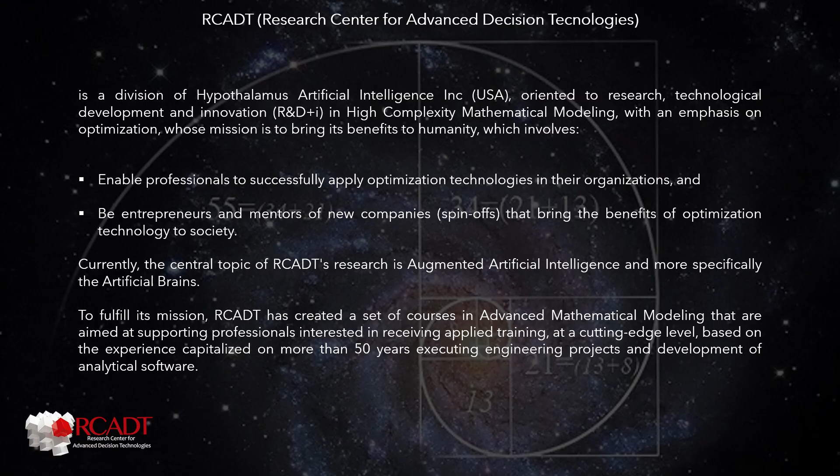To fulfill its mission, RCADT has created a set of courses in advanced mathematical modeling that are aimed at supporting professionals interested in receiving applied training at a cutting-edge level, based on the experience capitalized on more than 50 years executing engineering projects and development of analytical software.

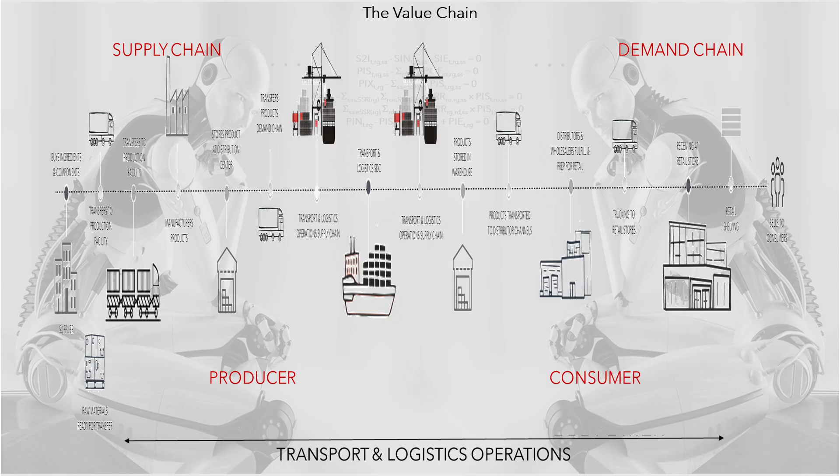The diagram presents the chain of the company's production chains that together make up the value chain. One of the greatest evolutions in the modeling of companies occurs in the interpretation of their value chain, linked to the evolution of different administrative practices and technological solutions leading to EWO.

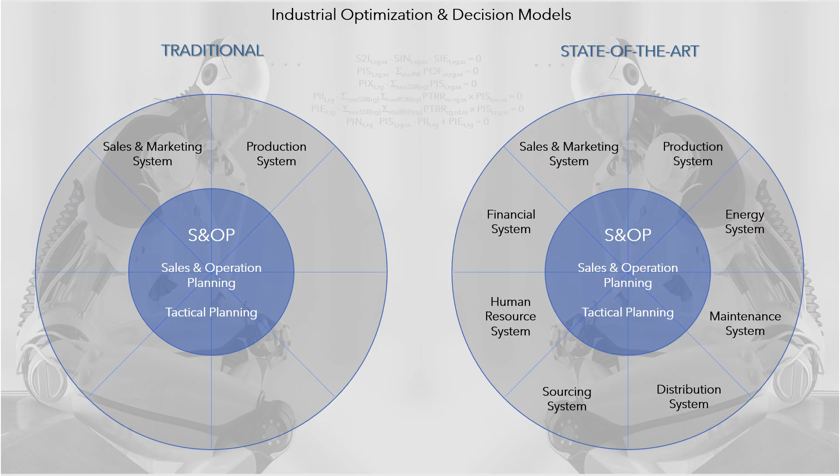Thanks to computational power, the integration process has continued to grow. The diagram presents the original S&OP model and its current version, which integrates more and more models.

This evolution has led to modeling based on artificial hypothalamus, supported by the integration of mathematical programming and artificial intelligence. The power of today's technology is not in the mathematical calculations it allows to be performed, it is in the mathematical calculations we can imagine we can perform.

Those interested in learning more about artificial brains are invited to read the white paper, Oil and Gas Artificial Brains, Case Pipelines Transportation, which is part of the course material on Oil and Gas Supply Chain.

The oil industry includes global processes of exploration, extraction, refining, transportation and marketing of petroleum products. The largest volume products in the industry are fuels, natural gas, fuel oil, and gasoline. However, petroleum is the raw material for many chemicals, including pharmaceuticals, solvents, fertilizers, pesticides and plastics.

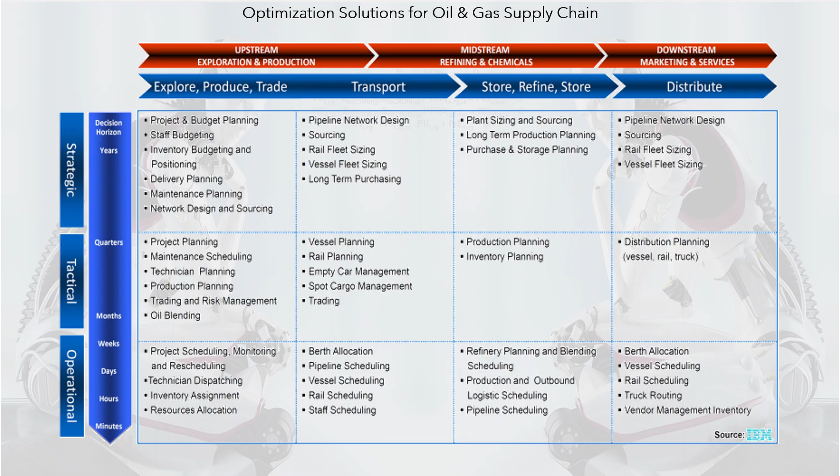The table, elaborated by IBM, shows a resume of the optimization solutions for oil and gas enterprises. At the origin of mathematical models in computers, starting in 1947, decision support systems, which represent the optimization system of an O&G company, have been visualized as composed of multiple mathematical problems, one for each line of the table, which are operated individually and communicated sequentially by humans. This way of operating produces solutions close to the optimal, but not optimal, because they generally have no feedback. The current technological revolution completely changes this approach.

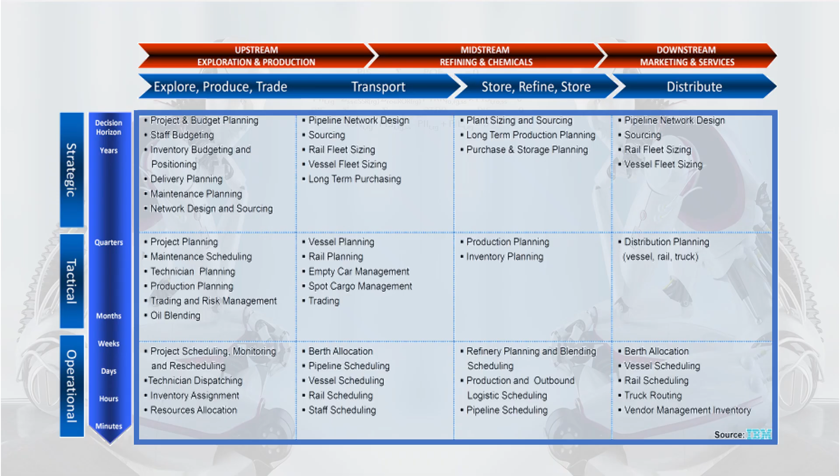Today, O&G's business optimization can be visualized as a single supermodel, composed of submodels, which in turn are made up of mathematical problems, one for each line of the table, which are solved by running in parallel, autonomously, communicating with each other, and managed by a mathematical artificial intelligence, produced by a generative artificial intelligence.

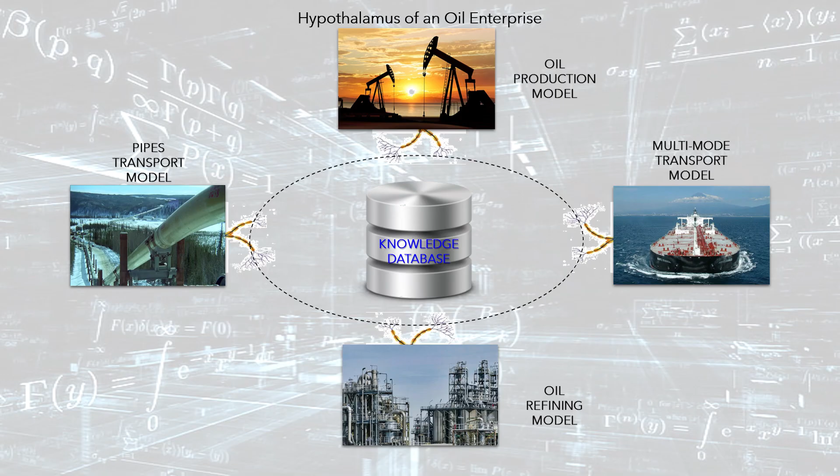The image presents the main models associated with the production of oil and gas. Oil and gas enterprise-wide optimization system integrates mathematical models for each of oil and gas's supply chain links, so that supply chain planning is managed with a holistic view.

Oil and gas production optimization integrates reservoir behavior as part of the optimization model. Considers four fundamental aspects: production system, reservoir behavior, operating modes of wells, and flow in the hydraulic system.

The objectives of optimization models depend on the planning horizon, and can be divided into real-time, advanced control, scheduling, short-term production optimization, planning, medium-term field optimization, strategic operations planning, long-term planning, reservoir recovery optimization, and strategic investment planning, portfolio optimization in oil exploration and production.

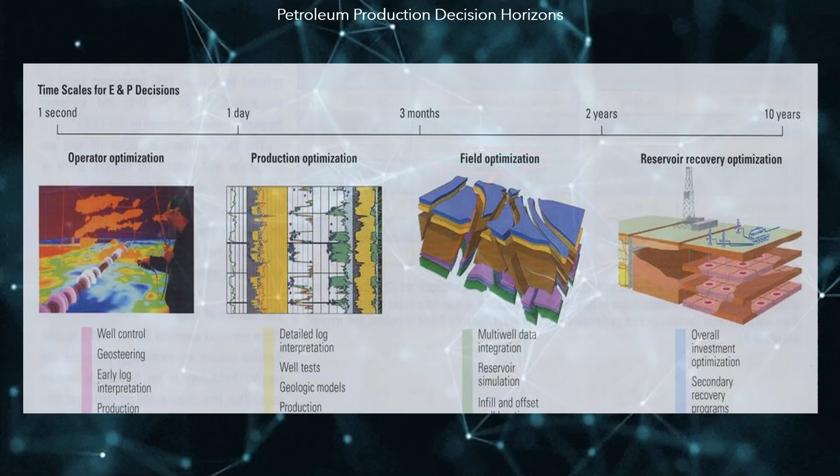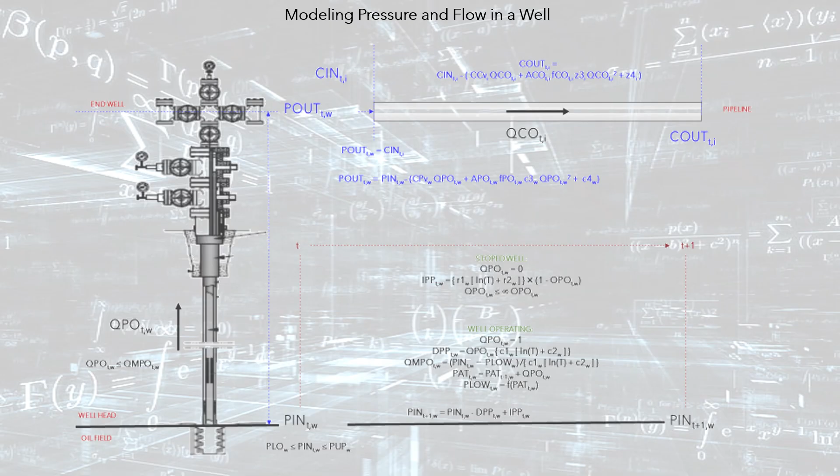The diagram summarizes the connectivity of the mathematical elements that allow modeling the well, in the aspects related to the pressure and flow of hydrocarbons, along the hydraulic system that is part of the production system.

Operations planning integrates multiple fields, which in turn comprise multiple oil or gas wells, which are operated by means of multi-well interconnection. Interconnection, which occurs at the surface facilities, allows gas and oil can be sent to storage for subsequent release through a transport system. The goal of optimization is to determine the contribution of each well, to meet demand while minimizing the total cost of the operation during the planning horizon.

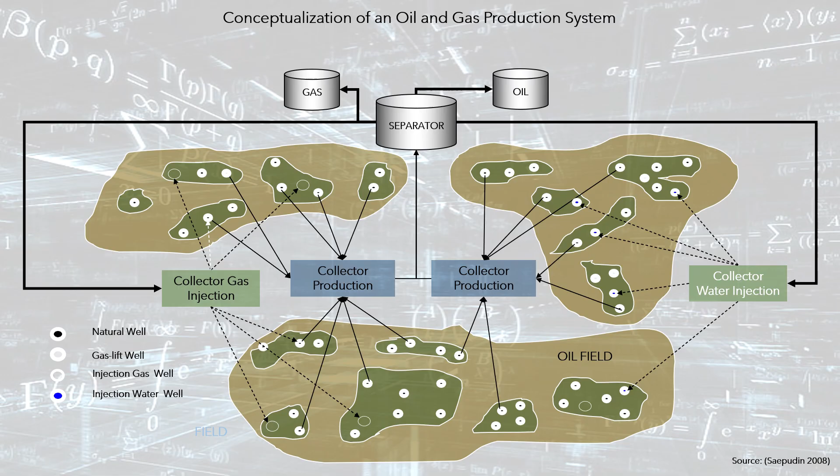This cost is associated with energy consumption in the production system, plus investment in adaptation of deposits when this restructuring of the productive system topology is allowed in the model. Smart grids, flue gas and hydrogen production, in oil and gas fields, are new activities that need to be optimized in the oil industry.

Oil transport, trading and blending optimization corresponds to a dynamic model that optimizes oil distribution between fields, refineries and ports, the oil mix for use in refineries, the mixture of oil for export in accordance with quality standards and established supply contracts, import of oil according to offers in the spot global oil market, and import/export of oil according to offers in the oil derivatives financial instruments.

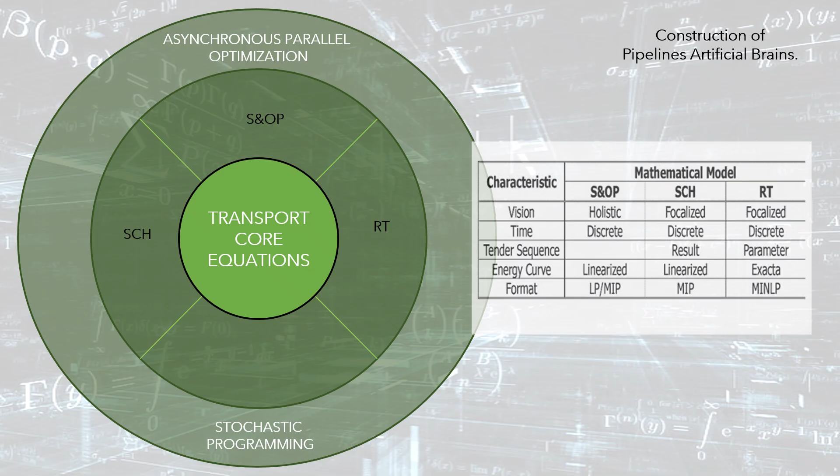Pipelines planning and scheduling. The image presents the main models associated with the transport of oil and gas. Piping systems require at least three models to coordinate their operation: S&OP, tactical planning, on the order of months and weeks; SCH, daily operations scheduling, such as tenders planning; and RT, real-time, on the order of hours.

Under the principle of transitivity of algebraic formulations, models grow in complexity as they descend from the hierarchy of decisions. All models share equations, mainly those related to the physical process. Therefore, they can be made in a continuous modeling process.

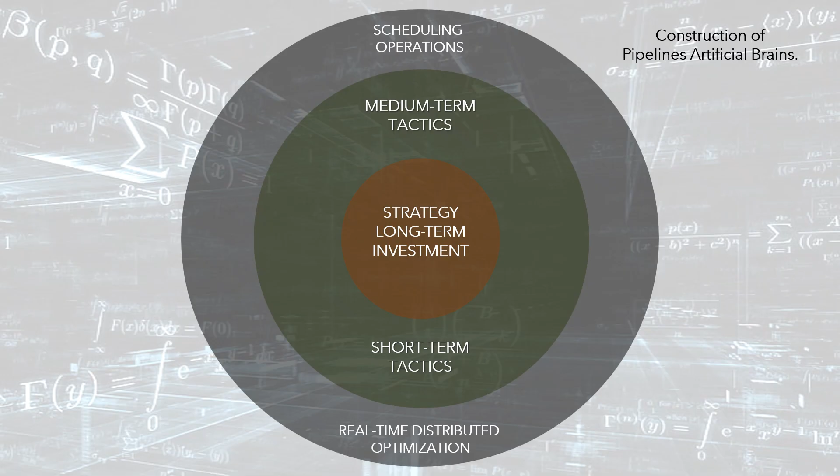The models of higher hierarchy will be more aggregated, in order to cover long periods of analysis, on the order of years. The emphasis of the model should include the interpretation of the economic and technological future, so it is appropriate that they are stochastic optimized. As the models approach real time, the level of detail increases, and the planning period decreases, the most important being the engineering representation of the process.

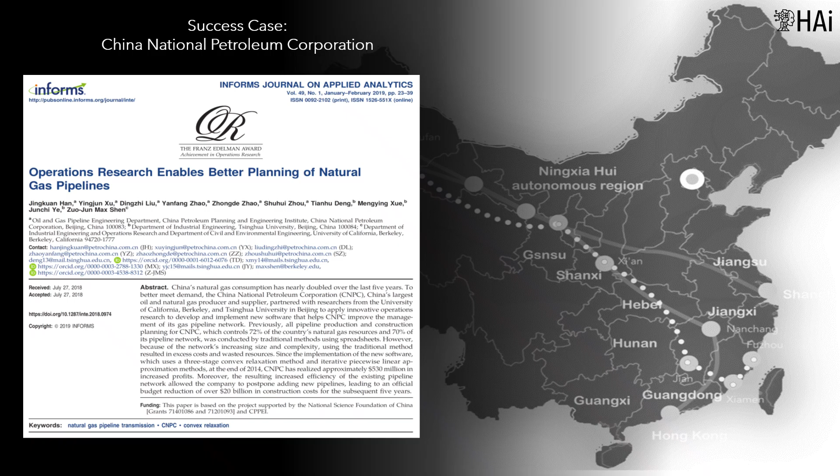The function of every organization is to produce wealth for all its owners, and this is not obtained only with goodwill. The paper Operations Research Enables Better Planning of Natural Gas presents the use of mathematical optimization models for pipeline planning. China's natural gas consumption has nearly doubled in the past 5 years.

To better meet demand, the China National Petroleum Corporation, CNPC, China's largest producer and supplier of oil and natural gas, partnered with researchers from the University of California Berkeley and Tsinghua University in Beijing to apply operations research to develop and implement new software to help CNPC improve the management of its pipeline network.

Previously, all pipeline production and construction planning for CNPC, which controls 72% of the country's natural gas resources and 70% of its pipeline network, was done by traditional methods using spreadsheets.

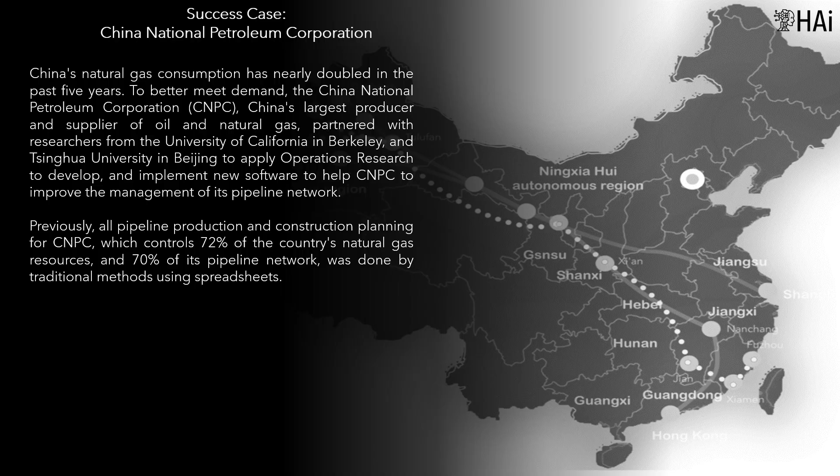However, due to the increasing size and complexity of the network, the use of the traditional method resulted in excessive costs and wasted resources. Since implementing the new software, which uses a 3-stage convex relaxation method and iterative piecewise linear approximation methods, in late 2014, CNPC has obtained approximately $530 million of American dollars in increased earnings, 2015 to 2017.

In addition, the resulting increase in the efficiency of the existing pipeline network allowed the company to postpone the addition of new pipes, leading to an official budget reduction of more than $20 billion of American dollars in construction costs for the following 5 years.

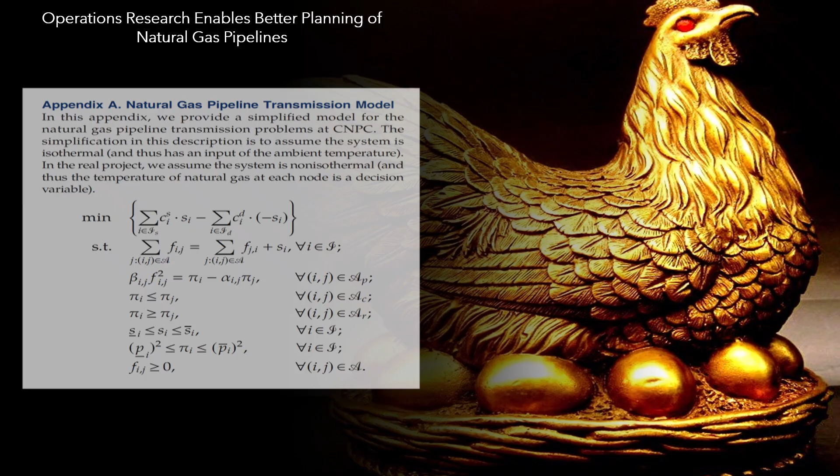The image presents the algebraic formulation of the natural gas pipeline transmission model. Without fear of being wrong, it can be said that mathematical optimization models are the goose that lays the golden eggs of China National Petroleum Corporation.

Oil transport systems optimization corresponds to a general model, common to all types of oil products: raw, refined, natural gas, and biomass, which represents the process for a specific system, including particular equations when required. It considers 2 types of transport modes: pipes and multimodal vehicles, like vessels, barges, train tanks, and/or truck tanks.

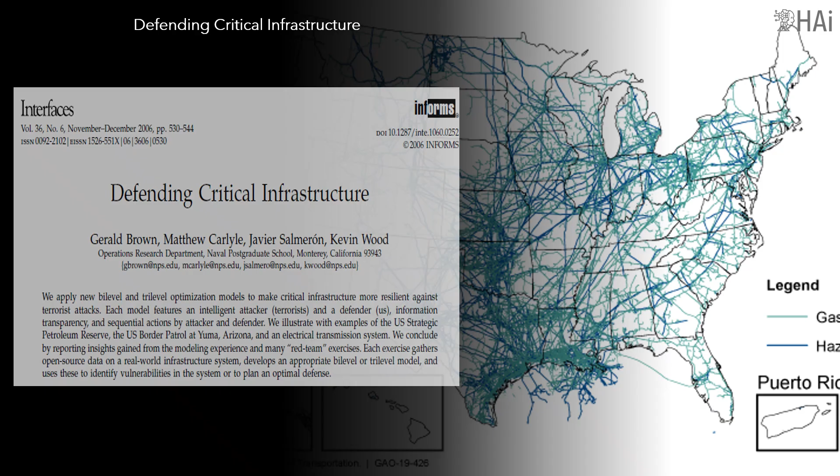Critical infrastructure protection: development of tools to anticipate, identify, and measure the risks to which a nation or region's critical infrastructure is exposed. This is to reduce the risks and consequences of an attack.

Bi-level and tri-level optimization models to make critical infrastructure more resilient against terrorist attacks are used. Each model features an intelligent attacker, terrorists, and a defender, us, with information transparency and sequential actions by attacker and defender.

3 real examples are presented: the U.S. Strategic Petroleum Reserve, the U.S. Border Patrol at Yuma, Arizona, and an electrical transmission system. Each exercise gathers open-source data on a real-world infrastructure system and develops an appropriate bi-level or tri-level model.

These models are used to identify vulnerabilities in the system, or to plan an optimal defense.

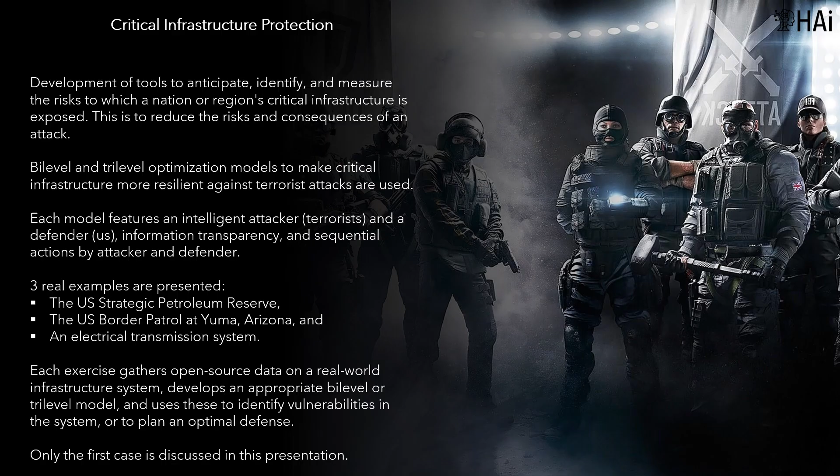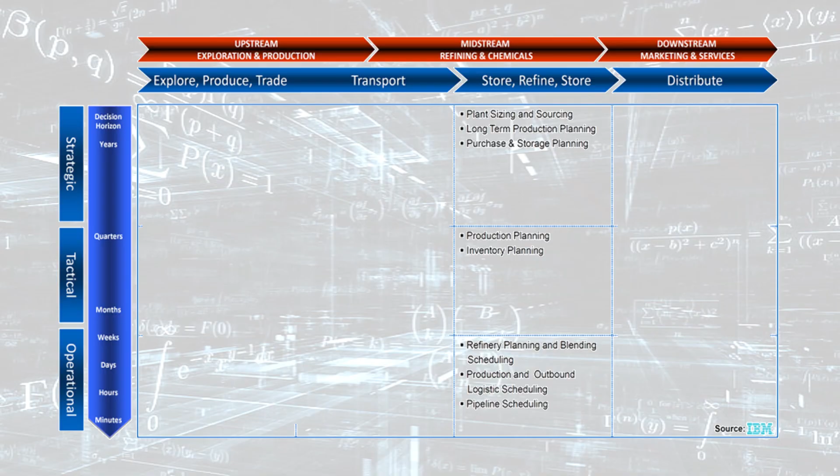Oil refining optimization includes a generic model that can serve interchangeably to plan the crude and/or biomass refining processes that may be spatially detailed in all units used in the production of refined products. The image shows the main models associated with the operations in oil refining and petrochemical plants.

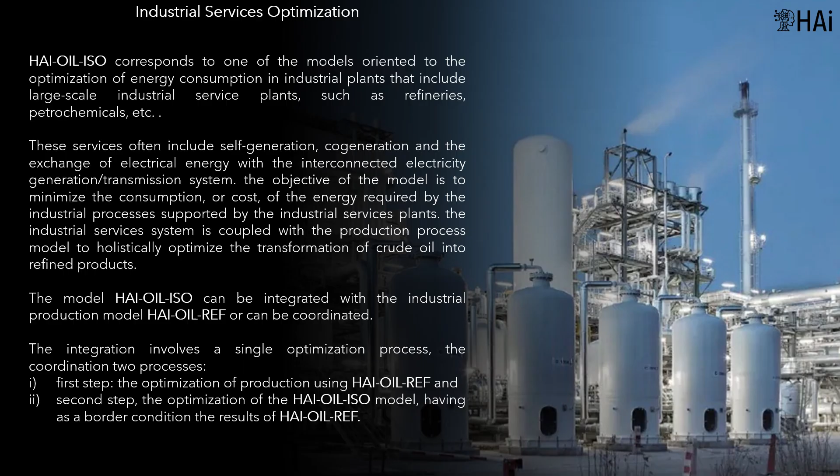The industrial services system is coupled with the production process model to holistically optimize the transformation of crude oil into refined products. The simultaneous optimization of both industrial production and energy conversion is related to polluting emissions of gases and liquids.

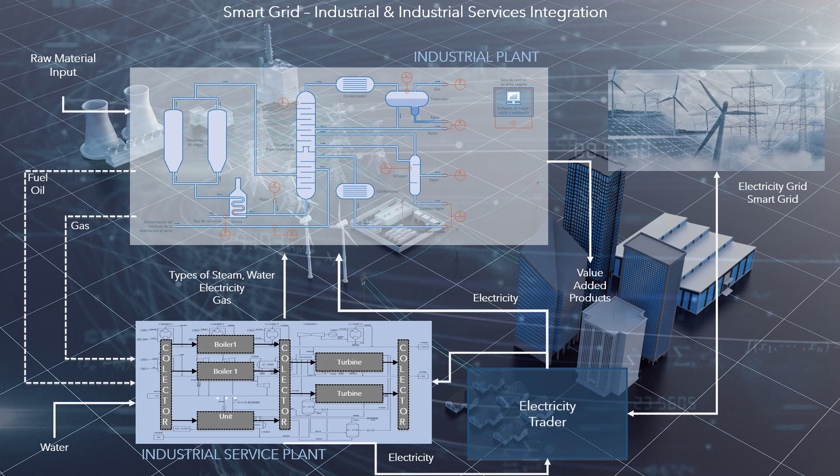Associated with increasingly demanding environmental control laws, AI may integrate complex industrial process models to redesign the power supply system according to new power technologies. This type of model includes the simulation of polluting processes to determine the optimal mixture of fuels, in accordance with environmental regulations. Other applications include water consumption minimization in industrial complexes and natural gas supply chain optimization.

Those interested in learning more about this topic can watch the video: Use case, Oil Express natural gas field exploitation planning.

Maintenance of oil and gas assets. The mathematical models required to carry out this work can be classified into two types: models for optimization of maintenance activities, and models to support general maintenance management.

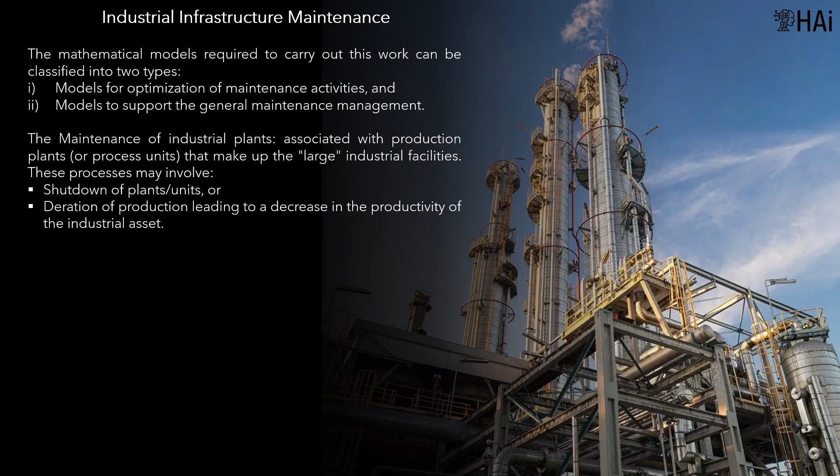The maintenance of industrial plants is associated with production plants, or process units, that make up large industrial facilities. These processes may involve shutdown of plants or units, or deration of production, leading to a decrease in the productivity of the industrial asset. Those interested in learning more about this topic can watch the video.

PHM, Prognostics Health Management. Optimal maintenance of industrial asset networks.

S&OP and ALM, integration of production, finance, and taxation models. ERM is a scientific approach to shaping risk, which is based on operations research methods such as applied probability and statistics, stochastic simulation, and investment portfolio optimization.

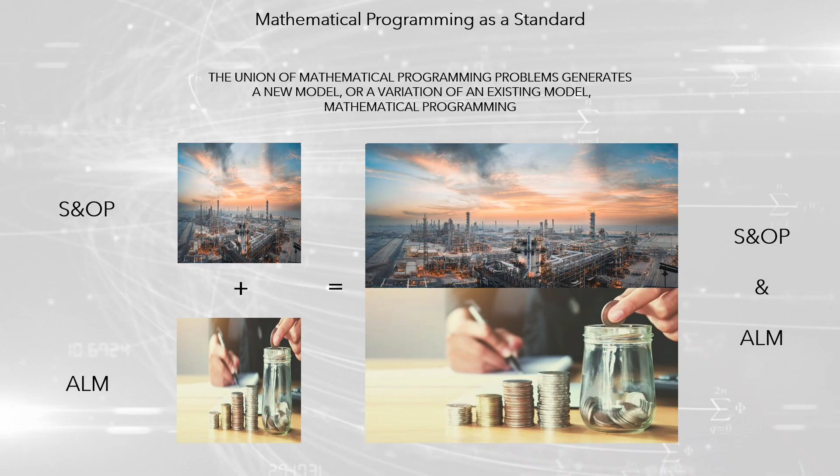ERM is a rigorous approach to quantifying and managing risks, from all sources, that threaten the achievement of an organization's strategic objectives. In the case of integration of production and finance, there are originally two models, S&OP and ALM. These models can be summed, resulting in a mathematical model containing the constraints of both, forming the S&OP-ALM model. The user will have three models: the two originals and the integrated model.

The integration process can be conceived as the S&OP model generating results—production and sales—which must be transformed into financial results in the ALM model, in such a way that the financial statements of the organization are produced, the control of which is the true objective of a private company.

The traditional approach is to coordinate the two models so that the productive model feeds the financial model. This process has no feedback, and therefore the financial model can be a workbook in Excel.

The modern vision is to integrate the two models into a single model, which has significant advantages. It becomes a feedback model between the two systems.

The field of control is expanded, as it is possible to introduce financial constraints into the production model, for example, cash flow constraints. Financial variables can be entered as part of the target function, e.g., the value of the firm at the end of the planning horizon, and achieve optimal solutions which are not obtained with the coordination of models.

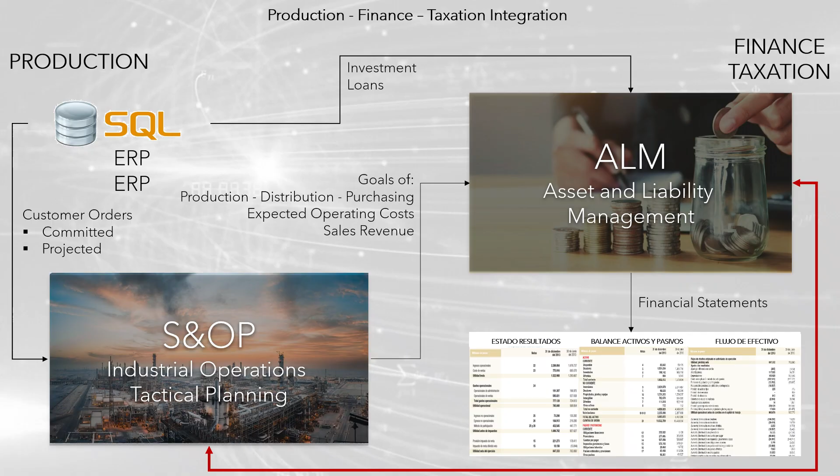The course director is the founder and scientific director of RCADT. Engineer Velasquez Bermudez's experience in applied operations research dates back to 1972, meaning he has accumulated more than 50 years solving real-world problems, doing engineering consulting using mathematical models.

RCADT is the most applied academic center in the integration of the teaching of mathematical programming and artificial intelligence. For more information you can consult the URL.

Alfred North Whitehead affirmed, 'Algebra is the intellectual instrument which has been created for rendering clear the quantitative aspects of the world.' Thank you for your attention.